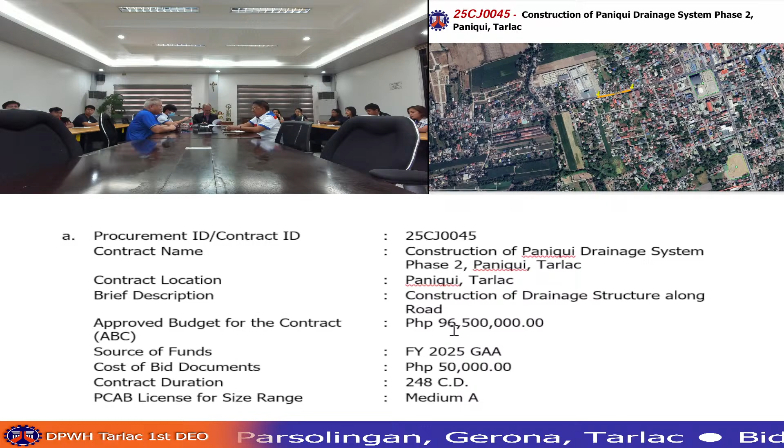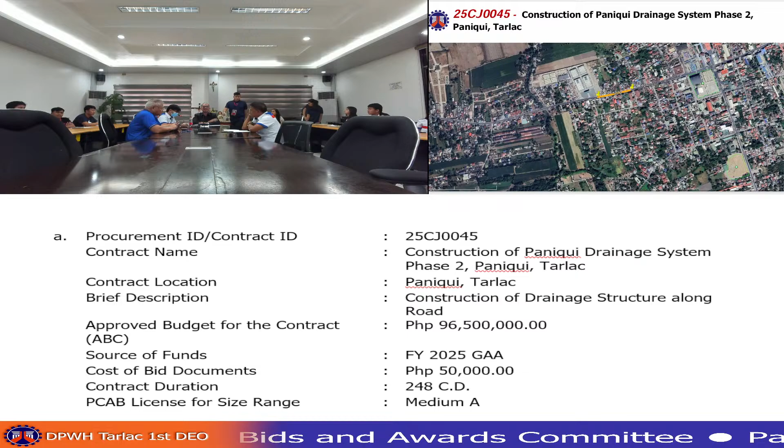Good morning. For 25CJ0045, construction of Paniqui drainage system, phase 2, Paniqui, Tarlac, located along Paniqui-Camiling-Wawa Road. The scope of work is rehabilitation of concrete line canal with paver blocks, curb and gutter both sides, with an average height of 1.7 meters.

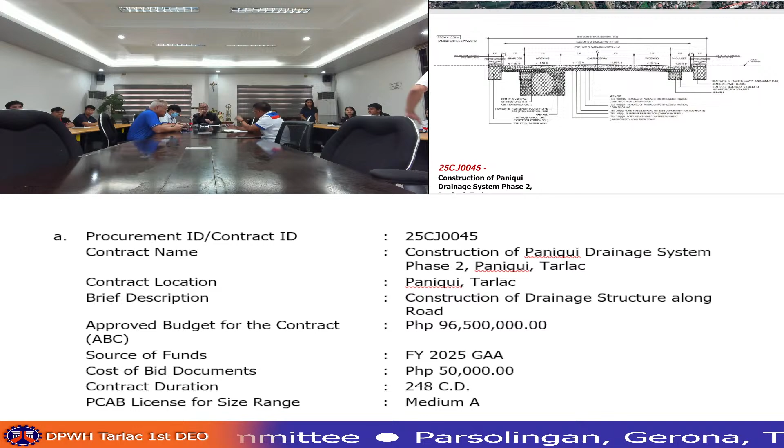Construction of concrete, plastic and fiber pipe, structured wall pipe, high density polyethylene pipe with a diameter of 2.1 meters along the carriageway, and a diameter of 1.0 meter as cross drain at every 50 meters.

Rehabilitation of a 4-lane pavement and shoulder with a total width of 16.8 meters and a thickness of 0.38 meters. Application of reflectorized thermoplastic pavement markings, white and yellow, with a duration of 248 calendar days.

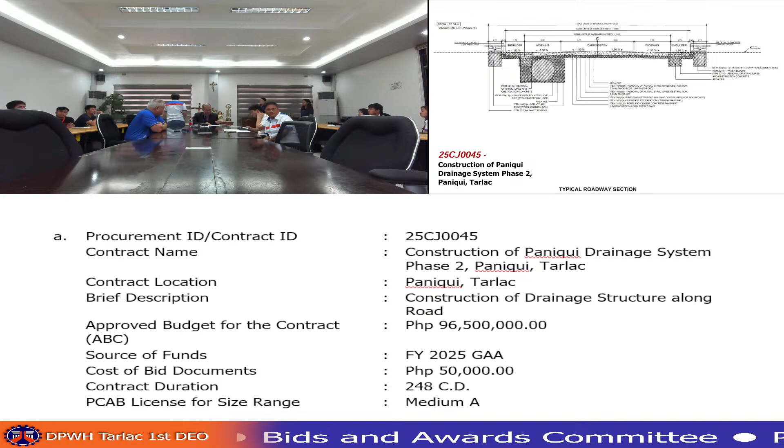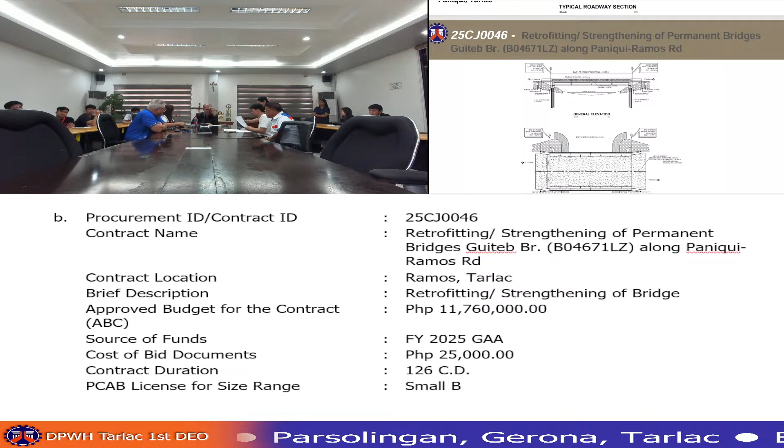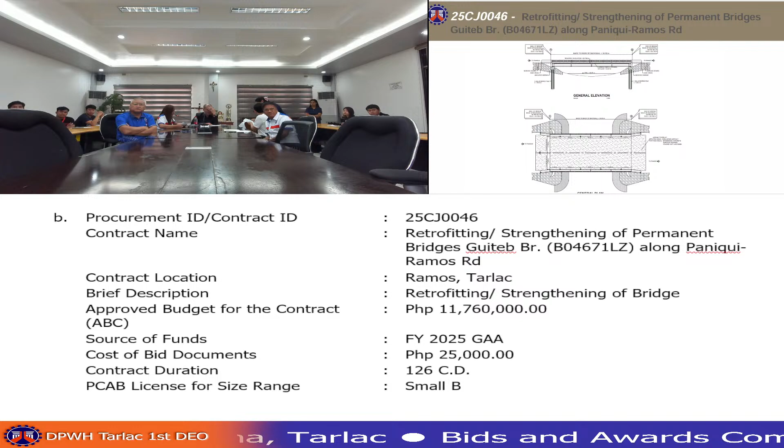Good morning. Today I am going to introduce a project with contract ID number 25CJ0046, contract name Retrofitting or Strengthening of Permanent Bridges, Guiteb Bridge, with bridge ID B04671LZ along Paniqui-Ramos Road. The anticipated contract duration is 126 calendar days, and this bridge has a length of 34 linear meters with 4 lanes and a total width of 16.9 meters.

The scope of works of this project includes, first, the general requirements; second, surface course, which includes emulsified asphalt with a quantity of 676 square meters; next is bituminous concrete surface wearing course, hot laid 50mm, with a quantity of 676 square meters.

Next is the bridge construction. First, we have the expansion joint, 30mm gap, steel finger type, with a quantity of 14.64 linear meters, located at abutment A. Next is carbon fiber sheet with 2 layers, with a quantity of 115.2 square meters.

Next is waterproofing on deck slab, liquid applied, with 498 square meters. Next is epoxy injection on crack with a quantity of 69.30 linear meters. Lastly, we have miscellaneous structures, which include reflectorized thermoplastic pavement markings, color white, with a quantity of 14 square meters, and reflectorized thermoplastic pavement markings, color yellow, with a quantity of 14 square meters.

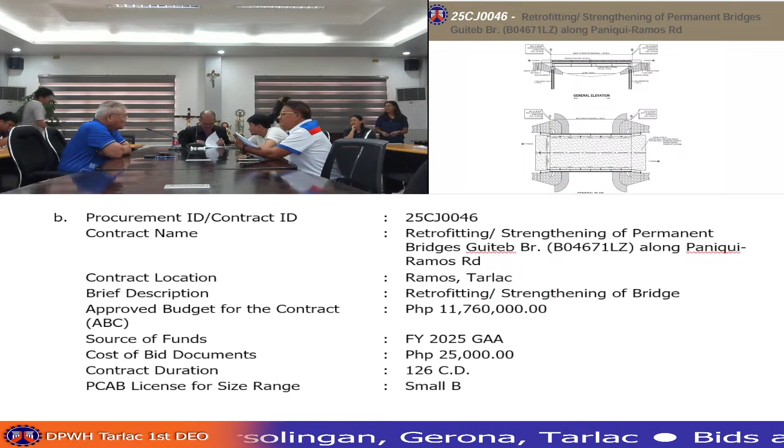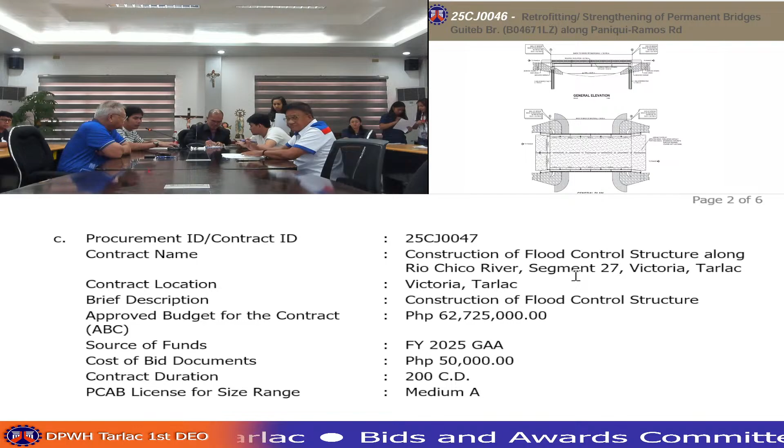Morning everyone, I'm Mario S. Villanueva Jr. from Planning and Design section. I'm here to present project ID 25CJ0047, construction of flood control structure along Rio Chico River, segment 27, Victoria, Tarlac.

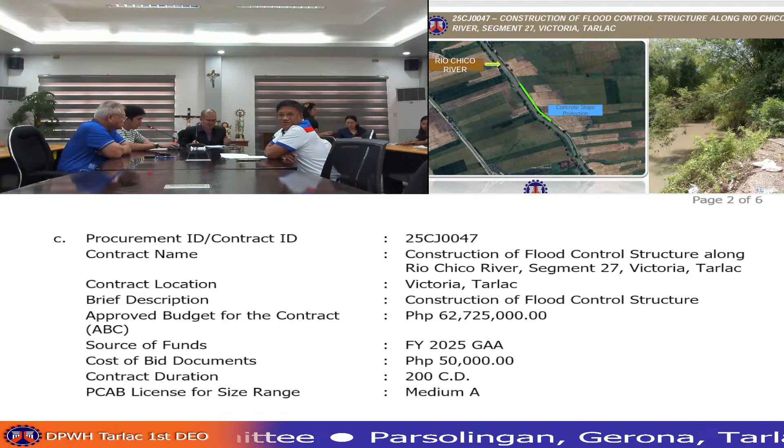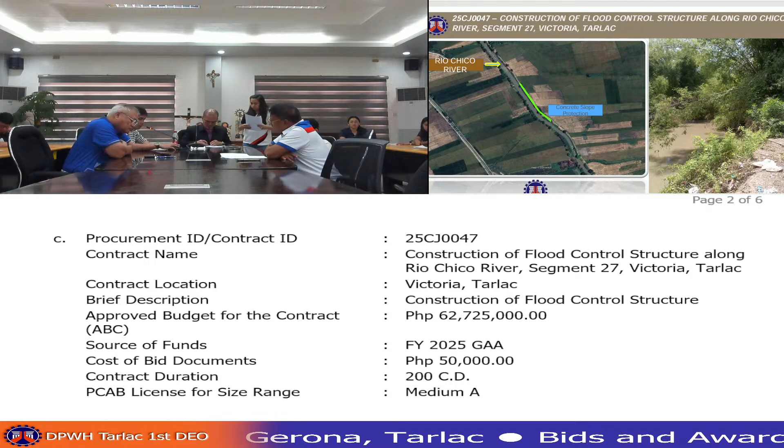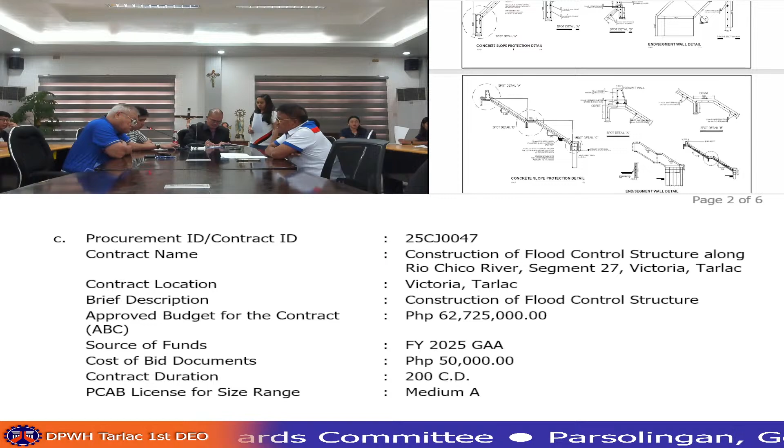The scope of works comprises surface courses with 250mm thickness of Portland cement concrete pavement with a width of 6.1 meters, earthwork with 200mm thickness of aggregate sub-base course, and lastly, bank slope protection works.

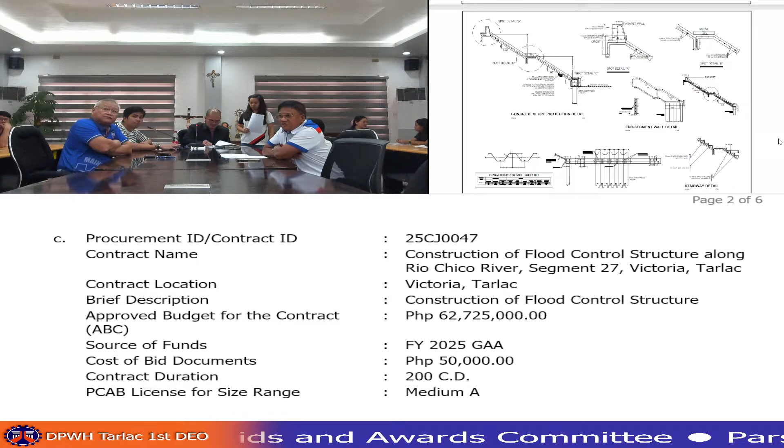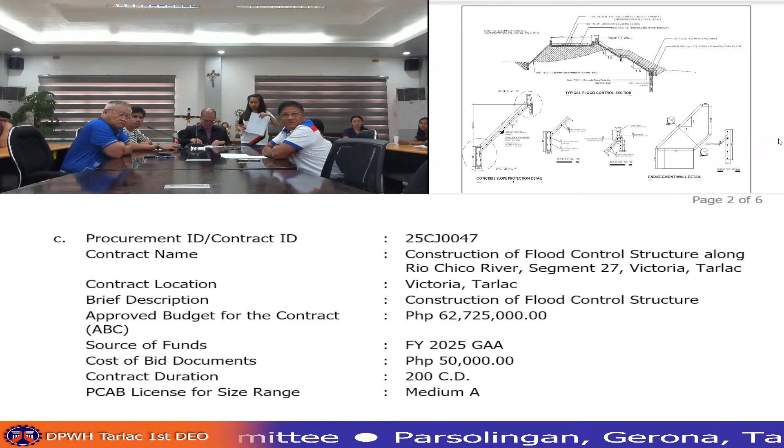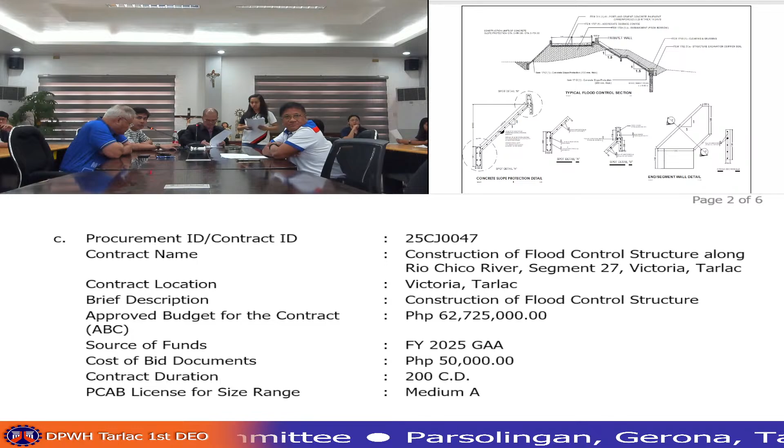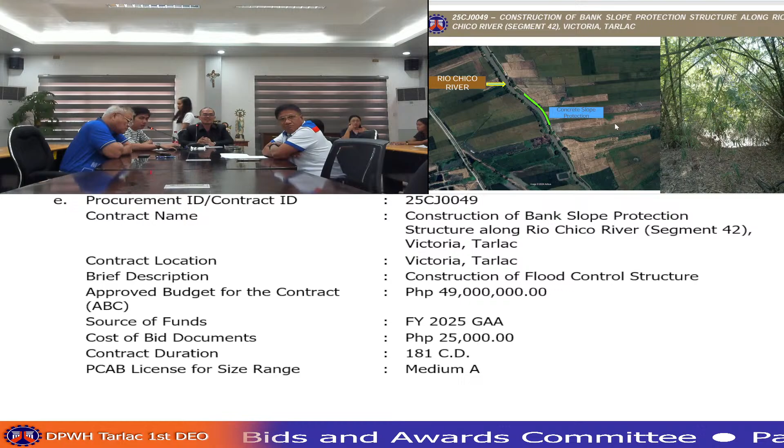Project ID 25CJ0049, construction of bank slope protection along Rio Chico River, segment 42, Victoria, Tarlac. This project has a total length of 185 linear meters concrete slope protection from station 791 to 976, with total project duration of 181 calendar days and approved budget for the contract amounting to 49,000,000.

The scope of works of this flood control project includes surface courses with 250mm thickness of Portland cement concrete pavement having a width of 6.1 meters, earthwork with aggregate sub-base course, and bank slope protection works. The length of steel sheet pile is also 9 meters, Z-type po, sir.

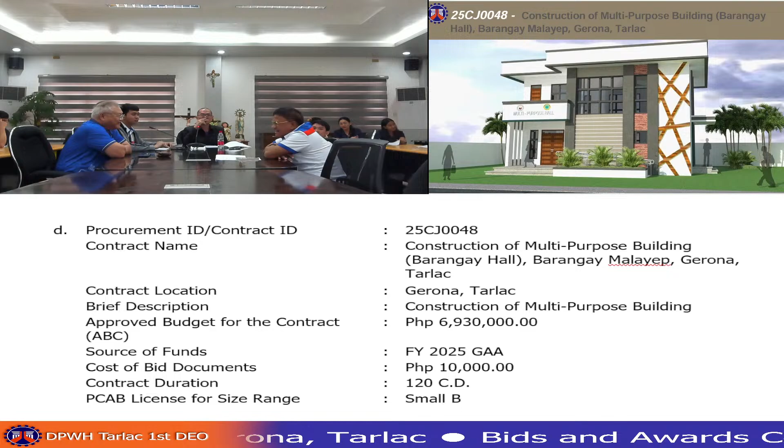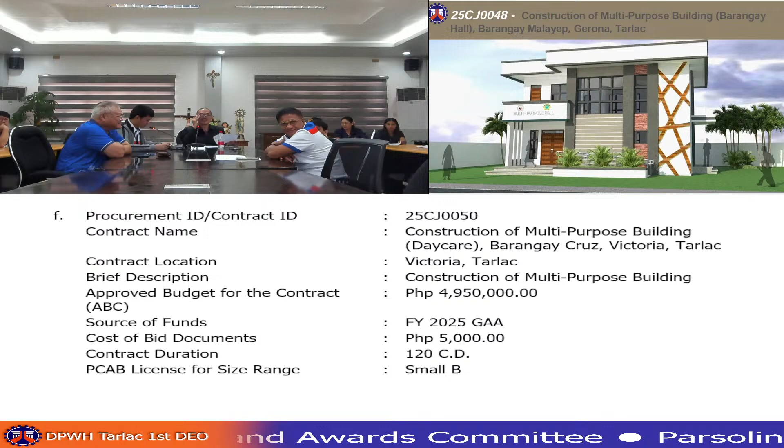Sige, next. For the next project with contract ID number 25CJ0050, contract name Construction of Multipurpose Building, Daycare, Barangay Cruz, Victoria, Tarlac. The scope of works includes the complete construction of a two-story daycare from structural to architectural finishes, which has a dimension of 9.4 meters by 8.5 meters, and also has a demolition of existing structure with a dimension of 4.1 meters by 7.1 meters.

Oh, makanya yan. Yan.

Oo nga. I-adjust nyo na lang sa actual, no? Boy, patapos. Oo. Sige.

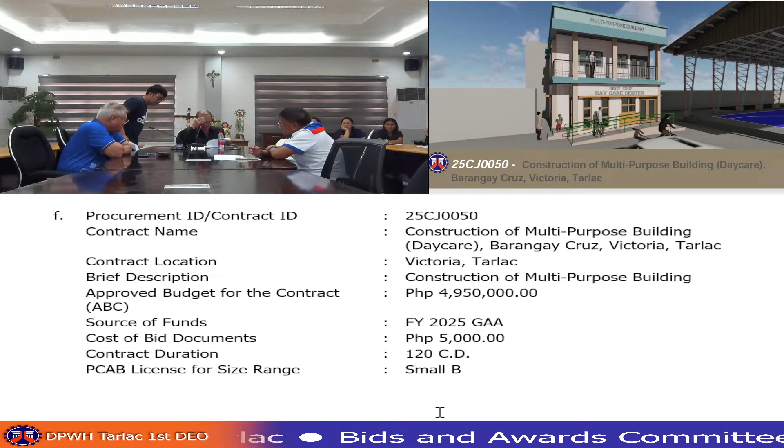Good morning, everyone. I am Engineer Eric Kimel Pagarigan, and I'll be giving a brief information about the contract ID 25CJ0051 with the project title of Construction of Bypass and Diversion Roads along Manila North Road to Tarlac San Miguel via Macabulos Road, Tarlac Phase 1 Tarlac.

Presented on the screen, the yellow line represents the project itself. It is located along Macabulos Drive, Romulo Boulevard, behind the lot premises of Fiesta Communities San Rafael. The beginning station of the project is around the front of Kamal Kalinga Housing Project in Barangay San Jose de Urquico.

The length of the project is almost 1.15 kilometers, wherein more than 1 kilometer of the project is only a left side construction because the right side is already done. The project duration is 193 calendar days with a total construction cost of 96.5 million.

The scope of work focuses on the construction of unreinforced PCCP with different thicknesses of 30 cm and 15 cm, with HDPE pipes embedded 2 meters deep from the finished grade line. Earthwork excavation is the majority of work. Apart from this, the project will also provide few solar LED street lights along the sidewalk, and retaining walls will be constructed on embankments higher than 1 meter for slope protection.

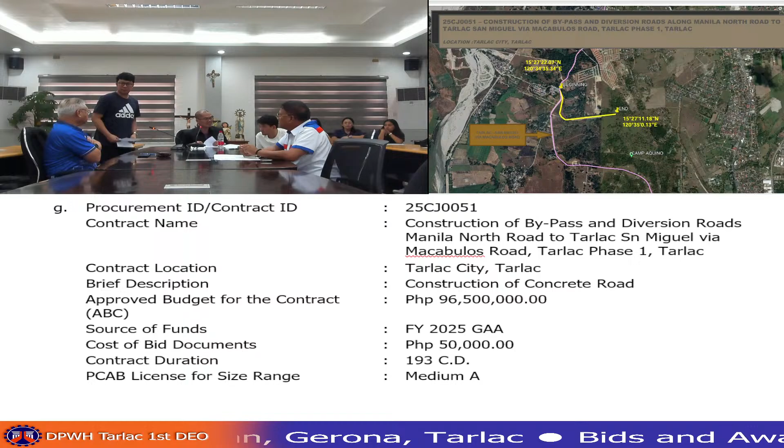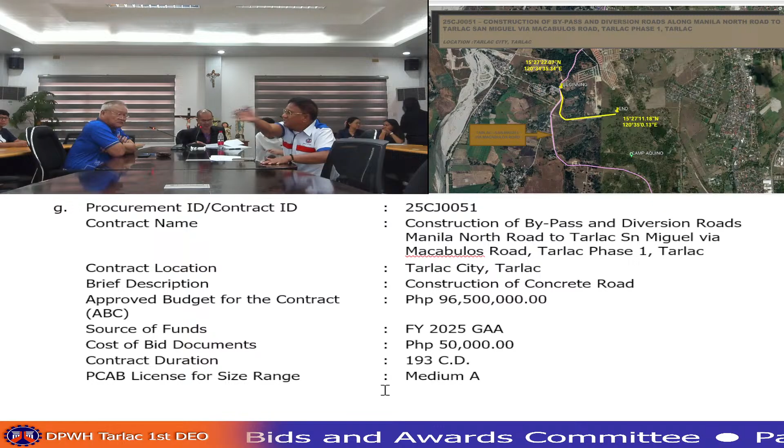Good morning, everyone. I'm Engineer Lorraine, and I'm here to present contract ID number 25CJ0052, contract name, construction of multipurpose building Daycare, Barangay San Agustin, Gerona, Tarlac. The scope of work: complete construction of two-story daycare with a dimension of 11 meters by 6.5 meters, and demolition of existing structure with a dimension of 8 meters by 9 meters.

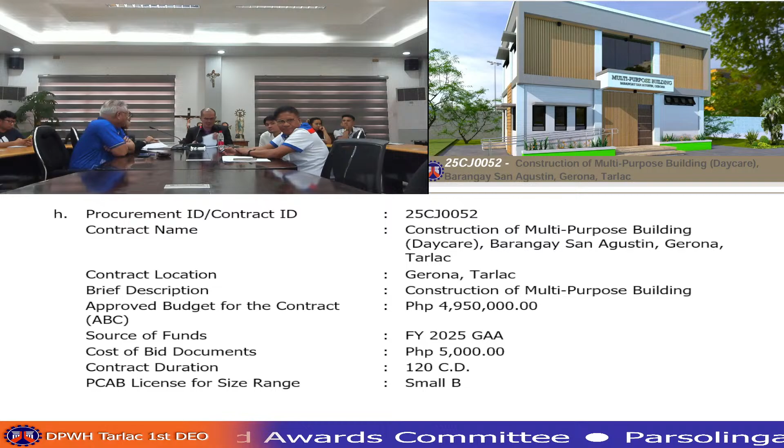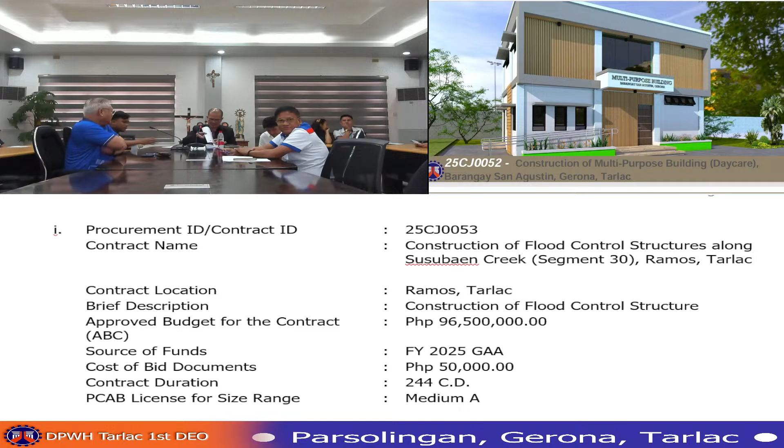Good morning, everyone. I'm Engineer Elisha Vicente from Planning and Design Section. For our last project with a contract ID 25CJ0053, construction of flood control structure along Susubaen Creek, segment 30, Ramos, Tarlac.

This project has a net length of 415 linear meters with a total project duration of 244 calendar days and approved budget for the contract amounting to 96,500,000. The location of the said project is located within the vicinity of Paniqui-Ramos, Tarlac.

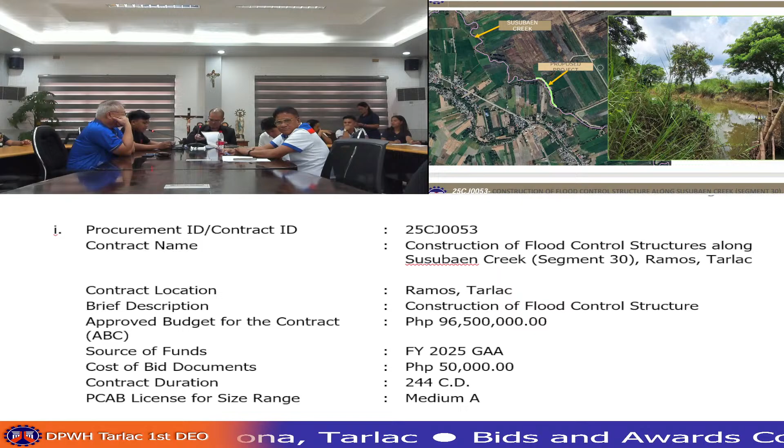The pink legend emphasizes the Susubaen Creek with the general features as follows: a basin area of 298 square kilometers, a length of 15.9 kilometers, a river width of 15 to 30 meters, and a channel depth of 4.5 to 5.5 meters.